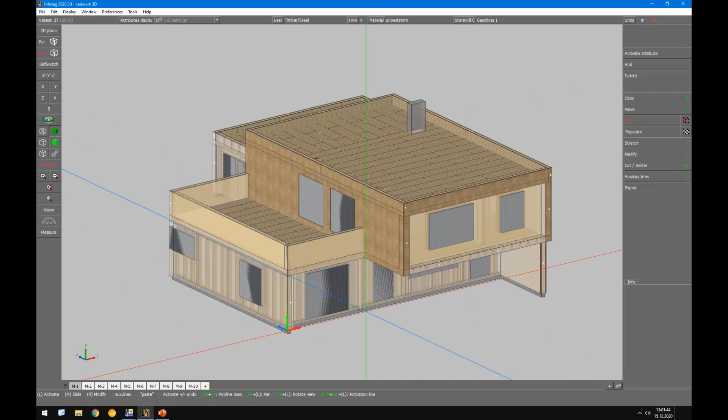Okay, let's not waste time. We start directly, in this case, in cadwork. We see the model there, and let's have a look underneath the rendering, and we will see how it was solved.

So you can see here the CLT slab, and here on the left side of this problem. Okay, I got some issue with my monitor. So we have beams and dowel type connection. So we get one component here in the vertical direction via this column, and one component goes in the upper chord to the next tension beam and downwards. So I'm interested only in...

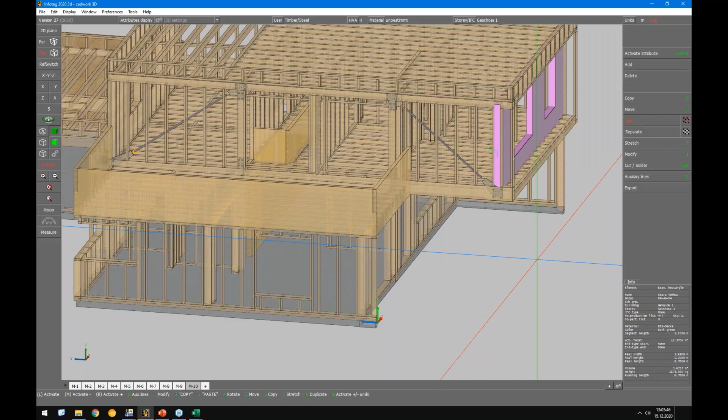The aim now is RFEM, and we can use it by export, for example an IFC file, or we can export a DXF file. But there's one smarter solution. In this case, I will have a look only at this element here, and I'm interested in the center lines, because this is a solid element, and I want to design it with a surface element, not a solid element. So therefore we need the center lines.

Here in this case I can use a variant from cadwork, called - I was not able to rename it - but it's called center surface for CLT. Okay, so I use it and select the element, and then let's go to the wireframe mode. You can see here the center line or center surface, and this is actually the one and only element I'm interested in.

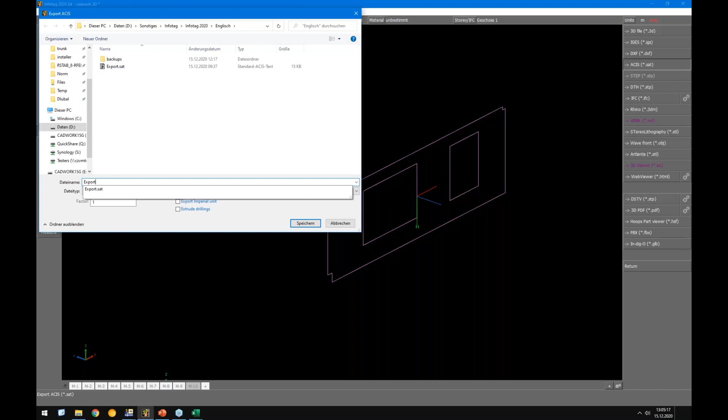So I have the possibility now to export it as a file. In this case, I use the ACIS export format. No wait a minute, I need to, of course, select all of them. All right, I save it, let's say export. And now I switch over to RFEM.

Here I'm able to import this SAT file. I select the Eurocode 0 plus 5 for the SLS combinations, EN 1990 plus EN 1995, and we leave the global Eurocode, but of course you're able to select any other national annexes. Okay, we want to create load combinations automatically. I select it and click OK.

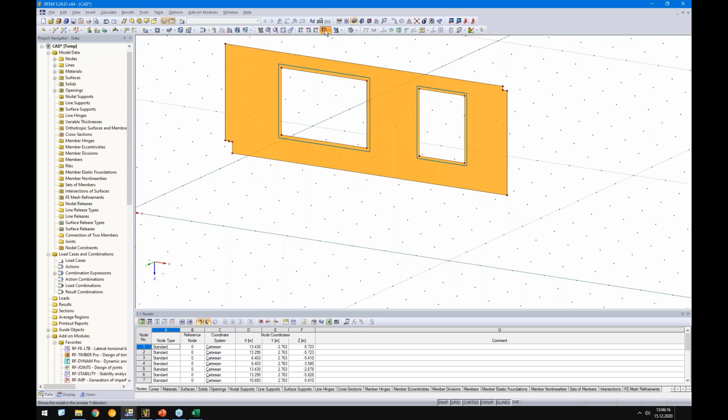All right, then let's see what we have here. So you see it is, or the wall was overtaken from cadwork with the openings, and there is a material assigned. Okay, it's a softwood material, but it's not important for now, we will come to this later. We want to clean up the model a bit.

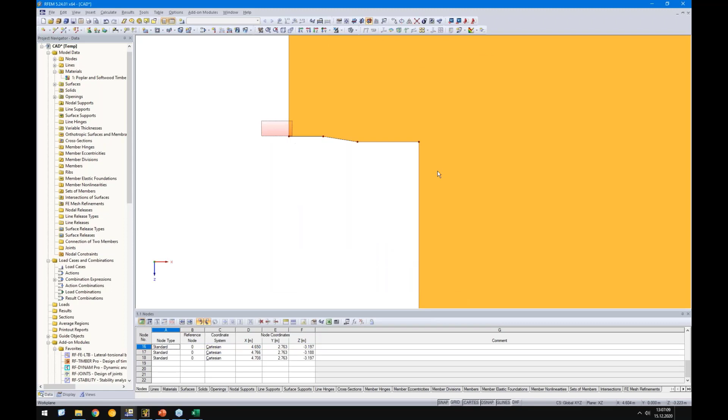For example, I want to ignore this notch here on the upper right side. I will move this node to get a sharp corner. Perfect, and I will do the same here. We have this tiny step here, or this tiny jump, I want to neglect it of course. So I grab the coordinate of this node and assign this coordinate to all other nodes. At the end, I will merge these nodes.

And the same on the left side.

Right side, I mean. All right, so now we can start actually by adding the loads, supports, and so on. But before we do this, let's think about what needs to be checked and what is important.

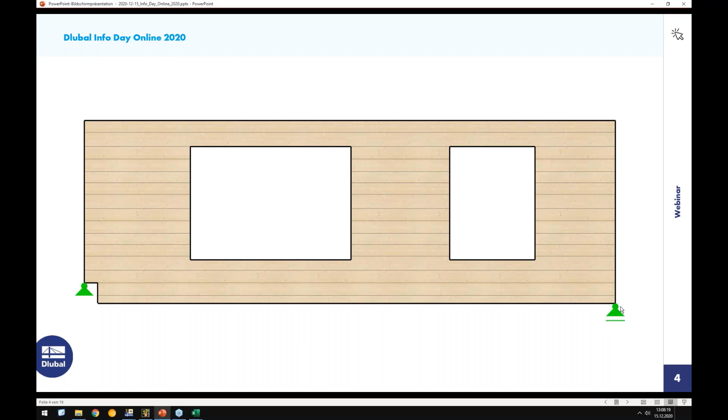You see here the rendering of this surface, and it's clear when there should be a support on the right side that the outer layers should be orientated in horizontal direction. That's one important thing, we need to take care of the orthotropic direction. So the outer layers should be horizontal, and every second intermediate layer should be orientated vertical. Next, we need to take care of the supports. In this case, it's just for demonstration reasons a nodal support. We will not use it afterwards in our design, but for the slide it is okay.

We need to take care of the FE mesh. What size should be used or is suitable? We talk about the stiffness of this CLT element, especially when we check this section here, through the wall. We see the horizontal layers and the transversal layers, orientated 90 degrees to the horizontal layers. And you see this white area - this is the space between this board and this board, because we do not use any glue at the narrow sides of the boards. This, of course, has influence on the stiffness, and we need to consider this correctly.

Okay, we have a tiny notch here on the bottom. Of course it will not be controlling since this element is really high in ratio to this small notch. But imagine when you have a CLT element as a beam, and you extend this line here, then you will see you have around 50% of the notch, and then it is much more controlling, and this fact needs to be checked. I'm just saying that you should consider it.

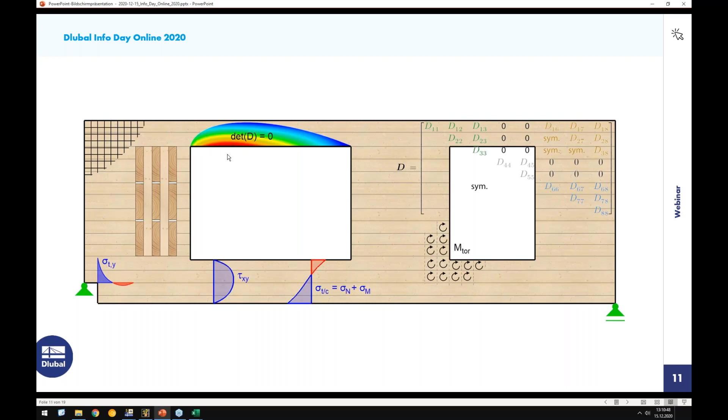Of course, we check our normal shear stresses, we check our normal stresses. Maybe buckling can occur - in this case we have roof beams and floor beams. You can imagine when this acts as a one-span beam, the upper chord is under compression, so it can happen that the bottom side of this upper chord can buckle out somehow. This is a fact we can check, or what we will check.

And of course, the window must work also in the deformed shape, so it should not get any crack or be destroyed. So we need to check the deformations, especially the deformation inside here, and of course the global deformation. All right, that's so far for my presentation on the slide side.

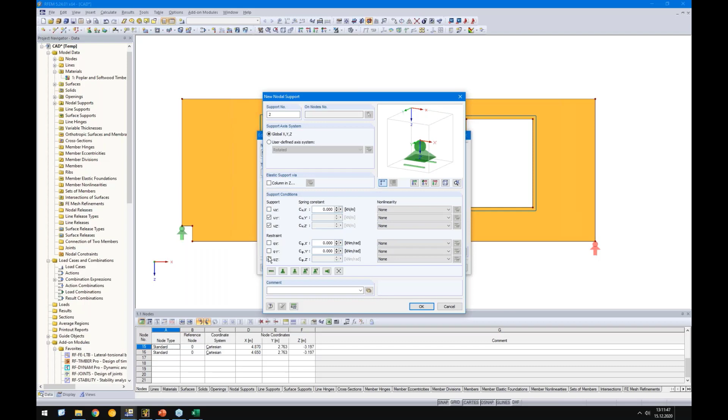And now, let's start directly in RFEM. I will start really with nodal supports to see the effects. I will support it on the left side, and on the right side I will use no degree of freedom in X direction. Of course, our wall is supported by the beams - the roof beams, the floor beams, and the walls. In this case, I will directly add line supports, supporting it only in Y direction, meaning out of plane. So here, here, here, and here.

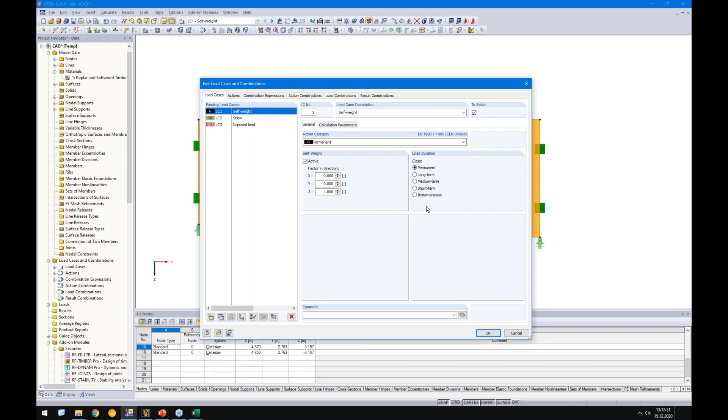All right, so then we can start with loading. We create, first of all, load cases. Load case 1 should be self-weight, and we want to consider snow load, and of course imposed load for the floor. You see here the load duration was assigned automatically, dependent on the action category. Now we start to fill the load cases with loads.

All right, so for the roof we have a line load of 5 kilonewton per meter. And for the floor it is the same, 5 kilonewton per meter. Then for the windows, of course, the window has a self-weight as well, which needs to be considered. Which ways do we have to fill loads for openings? There is, under tools, generate loads from area loads on openings. There is an option, but as you can see, it distributes the load also to all boundary lines, and this is maybe not the correct way I want to consider now.

I want to say that the whole window weight should act on these bottom lines here, so I use a normal line here. When you consider we have a density of 25,000 Newton per cubic meter, and the height of the window is 1.83, and let's say 3 layers with 5 millimeters is 0.015, that equals around 0.7 kilonewton per meter.

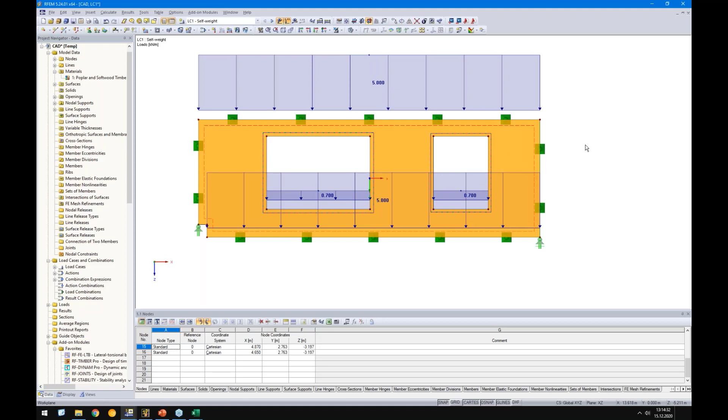Okay, and at the end we need to consider the weight, the self weight of all components which will be fixed to the CLT element. In this case it acts on the whole surface, so I use a surface load. It should act in Z direction, and the load magnitude can be set here.

In this case I could calculate it manually and enter the value here, but if you do this often, you waste a lot of time. So it's better to use our multi-layer composition.

Inside here, I have prepared a few compositions for the wall structure. In this case I use this setting here. Let's have a look inside.

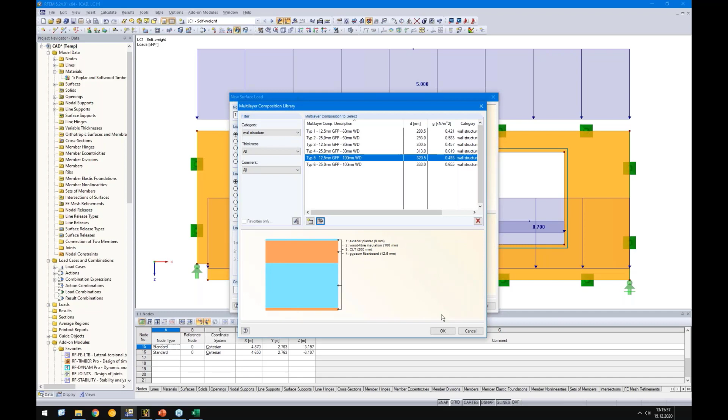So there is an exterior plaster on the outside, wood fiber insulation, then I have added the CLT. It should become 200 millimeters, and the density is 0 in this case because I consider the self weight of the CLT directly in my load case 1. So it's not necessary to enter a value here, but 0 isn't allowed, so just enter a small value like 0.0001 to get it directly into the graphic. Otherwise you need to delete it and you don't get this proper drawing. All right, let's overtake this value and click OK, and here we go.

So the next load case is snow load. The snow load is 3.6 kilonewton per meter. And at the end we have the imposed load for the floor, and the floor beams are fixed on the bottom side of the bottom chord with 6.5 kilonewton per meter.

All right, so far so good. We have finished loading, and we see directly the load combinations. Maybe you see here the 1.8. This considers the creeping effects.

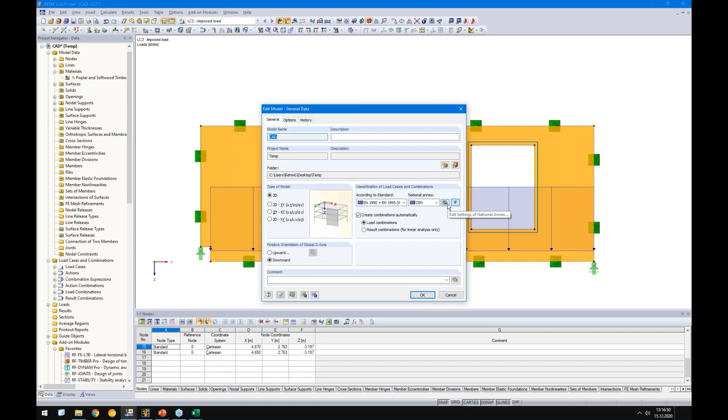I forgot to switch this, or to say, you can switch the KDEF factor at the properties of the national annex, and here on the bottom side you can switch, for example, to 0.6. When you check it, you see the factor is considered in the load combinations for the quasi-permanent loading.

All right, so then we can start with the analysis, and before we do this, let's check our FE mesh. So I just create the FE mesh and see what is the result. And as you can see, the FE mesh is absolutely bad and needs to be optimized. You see here it's the default setting of 0.5 meters, what we use in the background, but what FE mesh size should I use in this case?

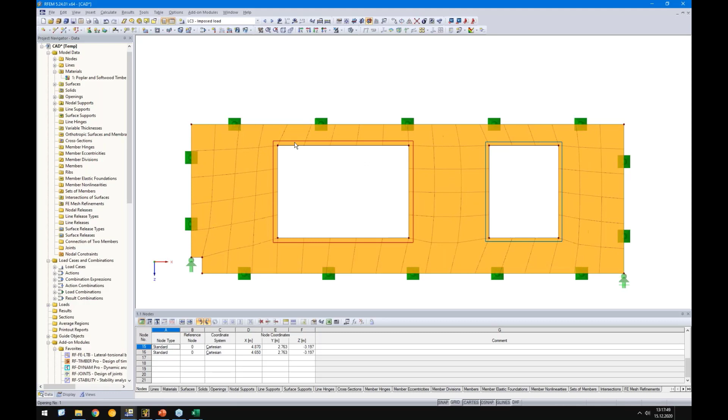The weakest point, I would say, or the weakest area, is here the upper chord, and you should have at least 3 to 4 elements over the length of the height of the upper chord. And with the background that the producer does not put any glue on the narrow sides, and even if they do, I do not recommend it as a rigid connection, because of humidity effects and so on.

Because of this, and we check this distortion design, what I mentioned in the presentation, the board width, or the FE mesh size, should be the same as the board width. So when you think about the ratio of board width to board height, around 4 to 1 or 3 to 1, then with a board thickness of 40 millimeters, what is used in this example, and using 3 to 1, we get 120 millimeter board width.

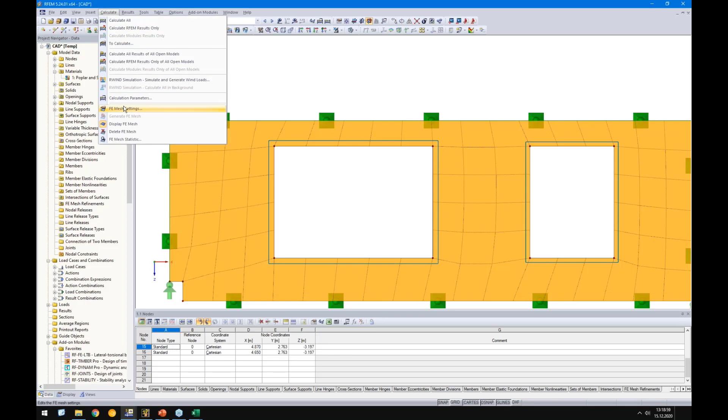So I will use here, let's start with 0.1 meters, and regenerate the FE mesh, and we will see, okay, we got 4 elements, we have these small triangle elements here and here. For membrane forces that's fine, but for bending they could deliver some bad results. So maybe I will increase it a bit and see what's going on here. Yeah, 0.11, looks good so far. So we use this mesh size for the analysis.

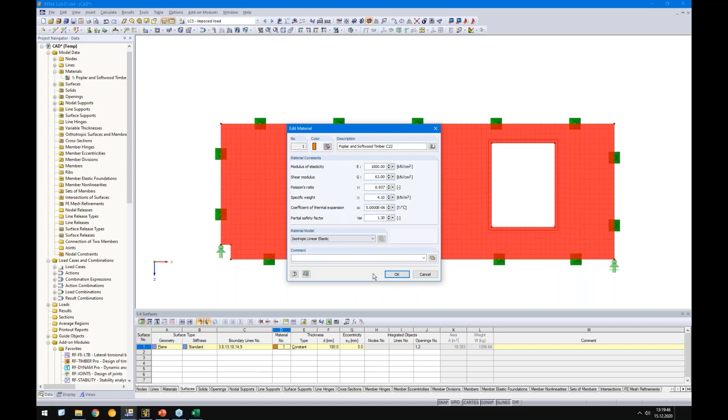Okay, then just try to run the analysis, and you will see we get an error message because of Poisson ratio. This is just a poplar softwood timber with an isotropic linear material model. Of course we can change it here to orthotropic elastic 2D, but in this case that's something special with CLT, because for CLT we have our add-on module called RF-LAMINATE.

Inside RF-LAMINATE we define the composition. And afterwards, before we run the analysis, the stiffness gets exported to RFEM, and then the internal forces are calculated based on the stiffness we exported. I want to design surface number 1 according to Eurocode for CO1 through CO5.

So for material characteristics, here we go with defining the composition. We have to select the surface, it's surface 1, and here we can import compositions from different producers.

That's one way, and the common way, to not favor any producer, is to create it manually. In this case, this is what you can do too. So I'll load the material from our material library.

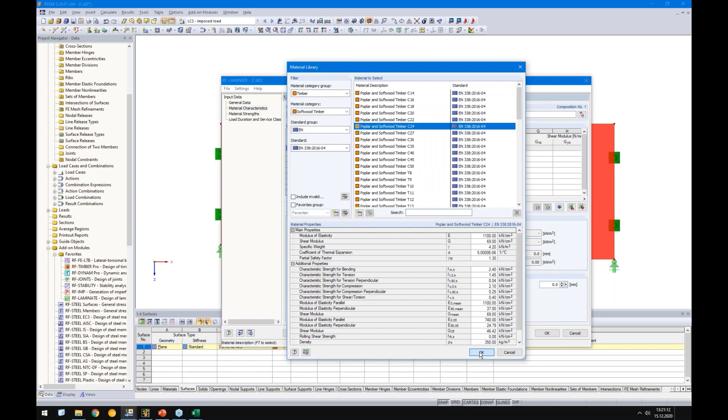So it's softwood, and I choose C24 in this case, and you see here all settings are filled. And in this case, I select cross-laminated timber. Let's see what's going on here.

We have the thickness, 40 millimeter is fine in this example. The values for EX and EY are loaded, and for shear modulus and so on.

Here for the second layer, I hit the F8 button. It overtakes the entry from the first column. So in this case, the orthotropic direction is 0.

You see here this coordinate system. The red arrow is the x-axis, and the green one is the y-axis. So if I rotate the second layer, you will see the red arrow goes downwards, and this is the transversal layer, so the second one. The same for the fourth layer.

Then let's go to the next tab, the material strengths. Here we simply modify the shear strength a bit because we do not consider any k_cr for surface design, and therefore I will modify it and set it for all layers.

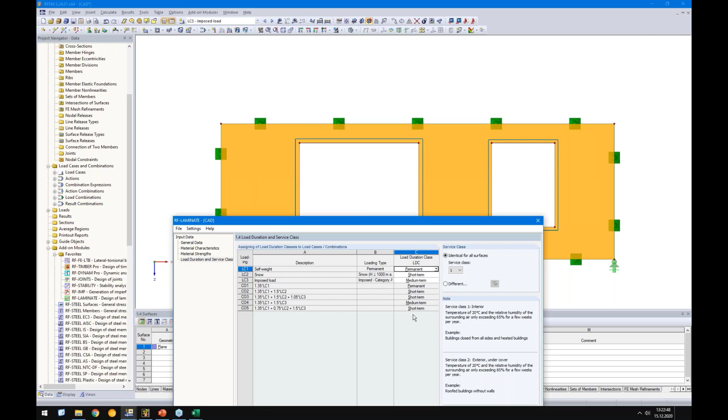The last tab is about the load duration class, but it was assigned automatically to the load cases, and therefore we always use the shortest load duration as the code offers, and it is assigned automatically. Here are a few settings about the service class, but this is fine for us.

Okay, let's go back to the composition, and let's check the stiffness matrix. So we have the stiffness matrix for bending, the elements for bending, for shear, and for membrane.

In this case, I do not consider any wind, since the wind was really weak in this example, and it is not controlling for this example. It's much easier in this case to consider and envelope the results. So therefore, in our case, only the stiffness matrix elements for membrane, meaning D66 through D88, are necessary.

But the only problem we have now is that we did not load it from the producer library. Therefore, we have a bit too much shear stiffness inside the plane, because how should the program know about the glue on the narrow sides? This is what I want to show you about this issue.

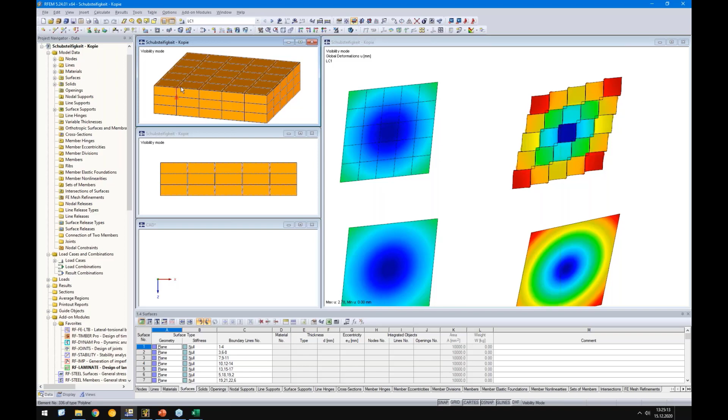So here I have prepared a small example with solid elements. In the upper one, I have no glue. On the narrow side, I have glue, so there is a rigid connection between the solids. On the bottom side, you see I have modeled a small gap in between each board from this direction, and also in the other direction on the upper side. And here you see the results.

This is the result from the solid, and this is the result from the surface and RF-LAMINATE. You see the result is the same. And of course, if there is no glue on the narrow sides, the deformation gets bigger, and this effect needs to be considered also here in RF-LAMINATE.

What you need to do is consider the ratio from this solid element to this surface or solid element. Then you get a factor and you know how to reduce the stiffness. Of course, this is really time consuming, and nobody wants to do this.

Fortunately, there is an approach already, based on the Austrian National Annex. Here you see this Excel sheet, which you can download afterwards on our homepage. You see here a small table, and you need to enter just the thickness of the slab, the amount of layers, and the board width, and you get a reduction factor of 0.59.

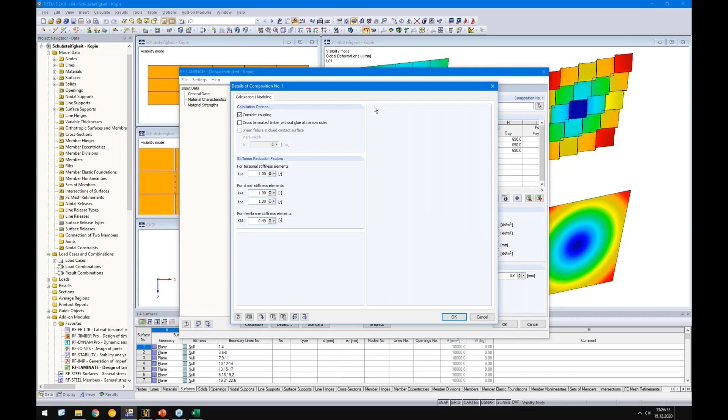And when you enter this value here in the details of the composition, as you can see here, you get exactly the same deformation as the solid elements have. This needs to be done in case the producer does not provide us any values, but normally they do, and therefore you don't have to waste time for this. All right, so let's go back.

For our example, we need to figure out these factors, so I'll open the Excel sheet. In this case, we had 200 millimeters, 5 layers, and 120 millimeter board width.

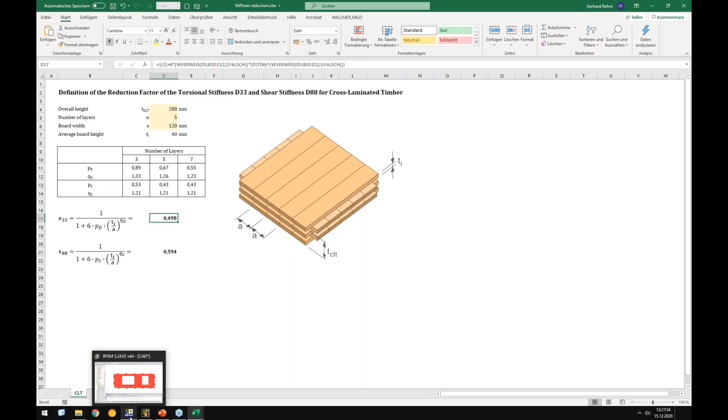We have a reduction factor for the torsional stiffness of 0.5, and for the in-plane shear stiffness of 0.6. These values we take over now, so it's 0.5 and 0.6. I use it also for the torsional element, since we do an eigenvalue analysis afterwards, and there the torsional stiffness is important too.

Here I say I have no glue at the narrow sides. You see there is an E-modulus in Y direction considered. We will check what happens afterwards, and we have 120 millimeter board width, that's because of this torsion design. As you can see here, the E-modulus in Y direction of each layer, not of the whole composition, only of each layer, is set to 0.

All right, and then let's start the analysis. Okay, so this is the result.

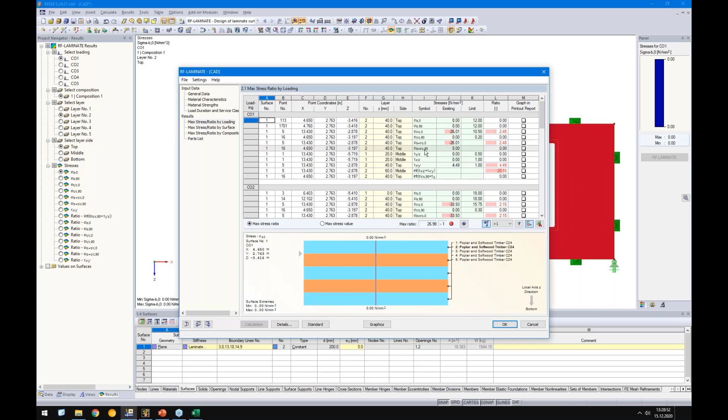The first time really confusing, but let's see what we can do. In this example, in this tab, you can select which designs you want to see. In this case, we have only membrane forces, so the stresses are constant over the thickness, and therefore I'm interested only in the results from the middle layers. Of course, I'm only interested in our normal stress and in our shear stress in-plane, that's XY, referring to the local axis system. Afterwards we activate the torsion design, but for now it should be fine.

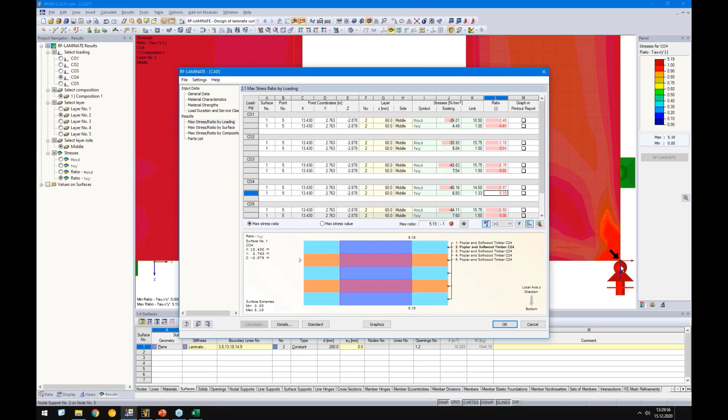Okay, then we come down to a ratio of 5 point something. Let's see where it happens. You see this black arrow here - of course, it's exactly at the location where the singularity is, where the nodal support is. And of course, everyone who dealt already with FEM knows that's a typical singularity, and we cannot evaluate these results.

So what can we do in this case? Of course, we can do the same as we do for loads - we distribute it to line loads or area loads. So in this case, I will distribute it to a line load.

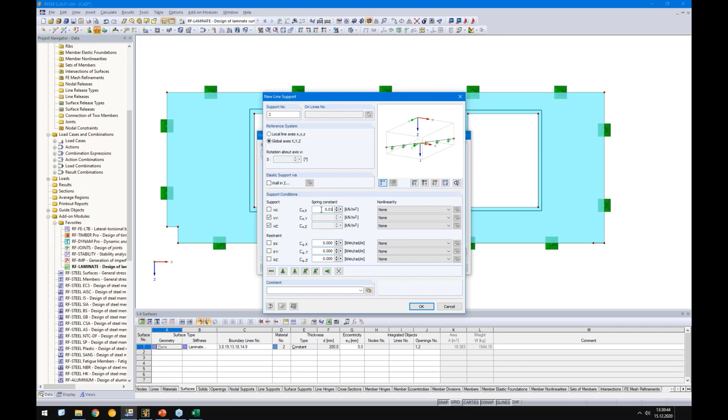No, wait a minute, it was the start. Support width is here 22 centimeters. Okay, so let's start here with the line support, and of course, yeah, we should release it in X direction, and I create only one support, and it should be supported in X direction. Therefore, I enter a tiny spring here in X direction, otherwise the structure would move to infinity.

All right, then let's go back to RF-LAMINATE again and check what happens. Yeah, so we had a ratio of 5 point something, and because of the line supports, we came down to 0.99. Of course, when we check the maximum ratio again, it comes from CO4.

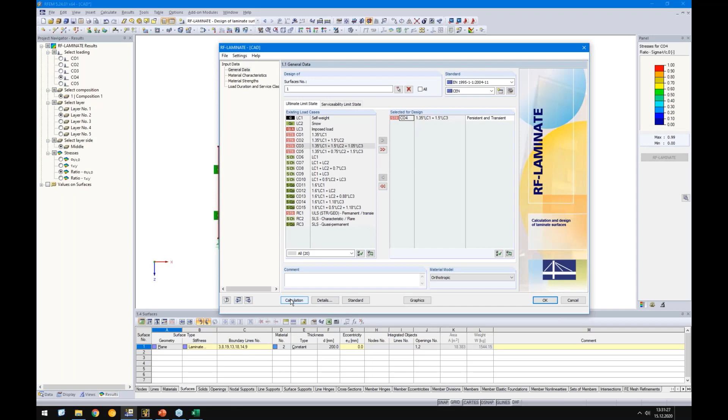Maybe the easiest way, I will remove all other COs for future analysis, because CO4 in this case is design giving, and I will check only CO4. It saves me a bit of time.

Okay, so we have 0.99, and when we check it, it's not in the corner, but it's here. Yeah, so we have no stiffness here on this line, but then we have a really stiff or rigid support, and of course we get another singularity here.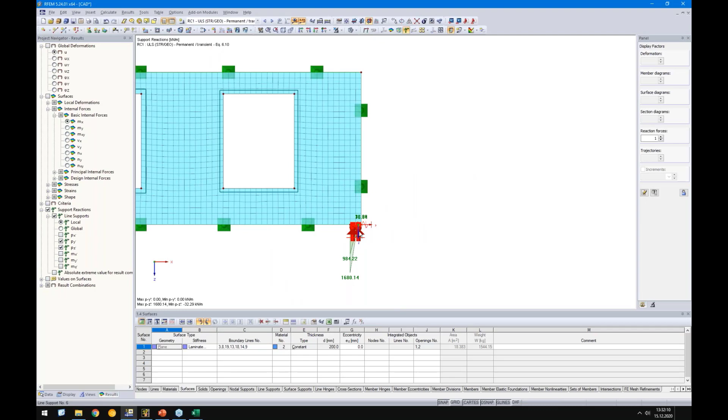Of course, in case we use this approach, we have to consider, okay, what about our support reactions? So I will check our support reactions, and we can see here, maybe we need to refine the mesh a bit, but you can see it here, also tension forces are covered by the support. Of course, this should not happen in our example or in general in timber.

Therefore, I add here a nonlinearity, which says, okay, please fail if there is a negative support force. So in case of tension, the forces should fail. Okay, then let's check it again, just to avoid any restraint here in this corner. Okay, then we are fine, perfect.

Okay, but yeah, let's go back to CAD work, and let's see.

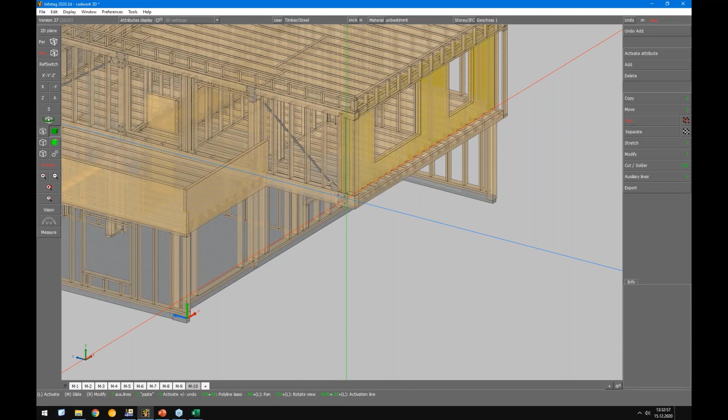Let's see here. This is considered, or the support condition here on the left side is still considered a rigid support. Maybe that's true here for the right side, but of course not for this side. How can we represent this support in our 2D analysis?

I have prepared a scene in CADWork, so these are my elements of interest. In this case, I can simply say export as a module structural system. This is what I want to do. Okay, there's something about the connection. I want to save it, let's say on the desktop.

I want to save this submodel as a DSTV file on my desktop. Now I can import it also here on the left side, CADWork STP file. So it's an STP file based on this interface for steel constructions, but it works also for timber.

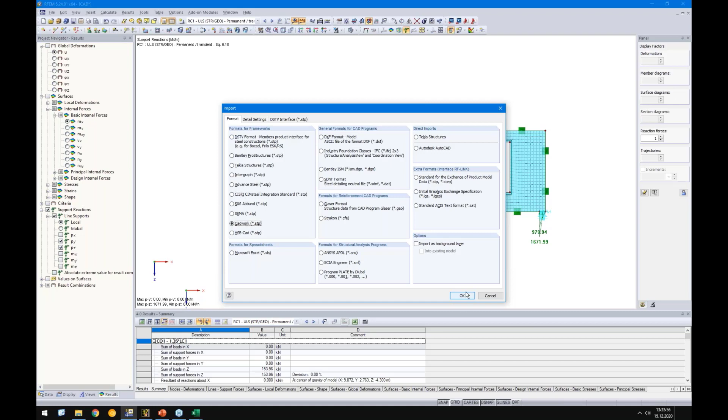Okay, so here we go. We don't need any load combinations, and we can simply import this file. Looks good so far. So we have the member elements included in RFEM, and let's see the wireframe model.

You see, there are still a few issues. We need to fix this, or we can fix it quickly here. So you see here, members are not connected, or members are too long, and so on. That's because of the half width of this beam element. This one we will fix via drag and drop directly, and the same on the right side.

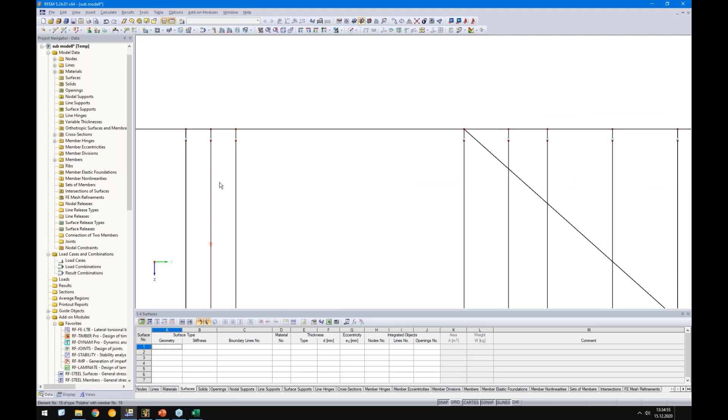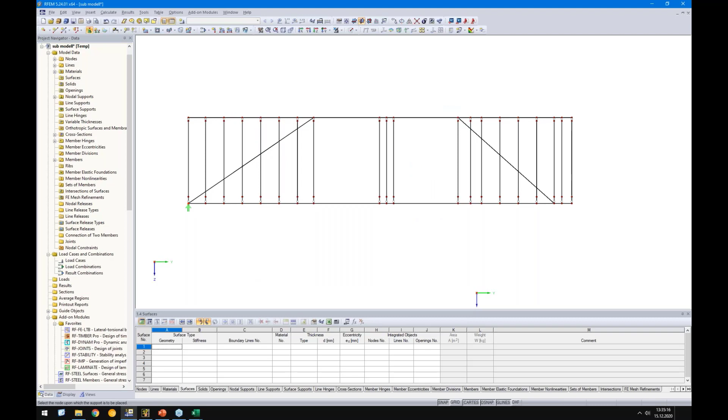And here on the left side. Okay, then we quickly support it. So we need to support it in Y direction, otherwise the beam would rotate around their own axis. And there is another support underneath this and this column. So I will add another one, which is sliding in Y direction.

Here and here. And the top chord, of course, must be supported, otherwise it will fall down or the beam will rotate around its own axis. Okay, so in this case, I need to restrain it around the Y-axis, for example, with a spring. And here I want to support it in X direction. For simplification, I just select it for all nodes, but I'm only interested in the vertical deformation.

And you see here, the vertical deformation is sliding, which is fine. Okay, and what is my aim now actually? The aim is I want to add a unit load here. And based on this unit load, I get a deformation. And based on this deformation, I can calculate my equivalent spring.

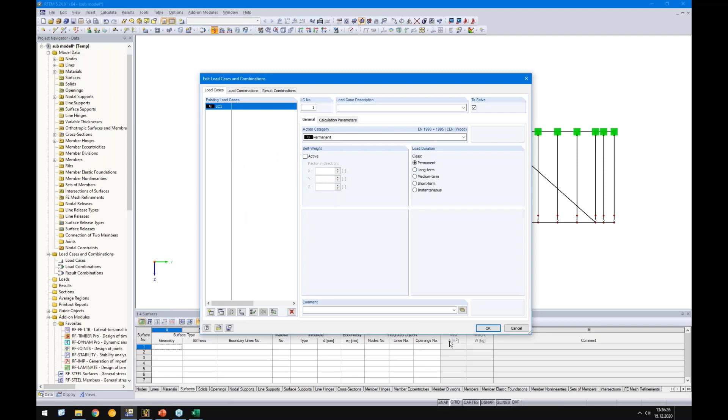So I create a unit load of 1 kilonewton. I deactivate the self-weight in this case. Please see, 1 kilonewton. And let's see about the deformation in Z direction.

Okay, I forgot to mention here we have some hinges and we have here some beams. Maybe I explain it in a better way. So in this case, I directly replace these beams by truss elements, with a hinge connection on member start and member end. And here these coupling members, which consider the eccentricity.

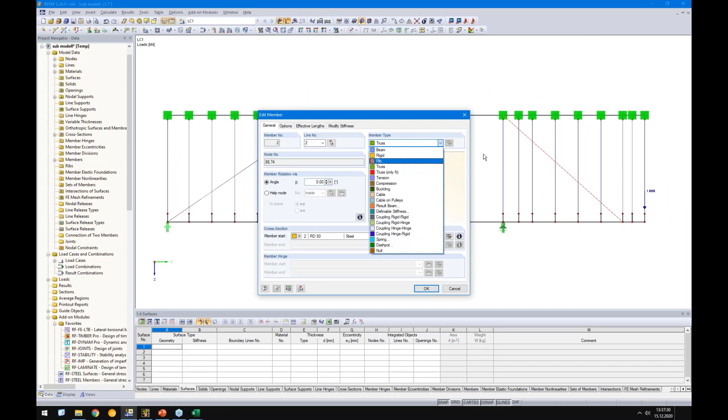The hinges come directly from CADWork, but I don't want to consider it, so I will delete it. Of course, you can discuss if this should be a truss beam or maybe better to use a tension beam, but in this example, we get only tension forces, therefore it does not matter.

Okay, we get a deformation of 0.147 millimeter. And of course, we can use now the spring. But of course, we know there is an OSB sheet on these beam elements. So we can add this OSB sheet too, to have more stiffness. This is what I will do now.

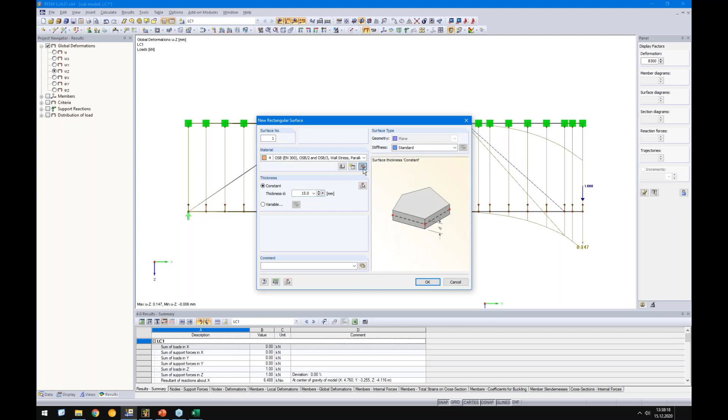I will create a new surface. So we have timber, OSB, and here we select wall stress. Should have 15 millimeter OSB 3 sheet, 15 millimeter. And in this case, of course, we cannot use an isotropic linear elastic material model. We will switch over to orthotropic elastic, where we have different E modulus in different directions.

Okay, so here we go, on the left side and on the right side. Okay, then let's run the analysis.

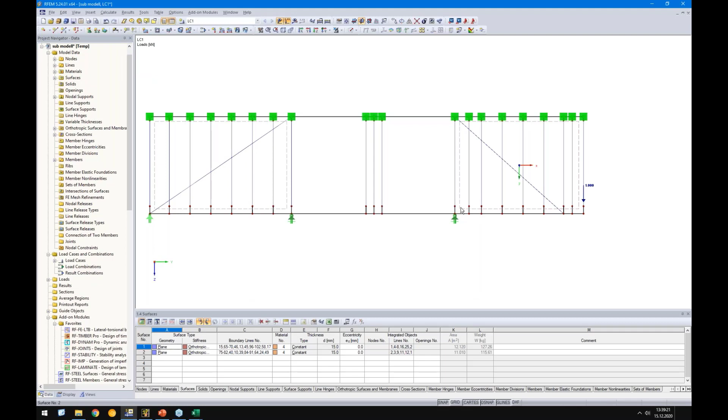We get an error. This error is because of these tension beams, or these truss beams. And you see here, there is no node, there's no connection to the beam, which is fine, but of course, there should be no connection to the surface as well. In this case, the easiest way is to tell the surface, please do not integrate this line, and then the member is not integrated automatically too. I will do the same on the right side.

Okay, let's run the analysis again. So we remember we had 0.14 millimeters, and now it comes to 0.089 millimeters. Okay, the FE mesh can be optimized.

Okay, in this example, of course the OSB sheet is connected rigidly to the beam elements. Of course, that's not the truth, because each timber element is connected to other timber elements with an elastic spring, for example, and this is what I want to consider too.

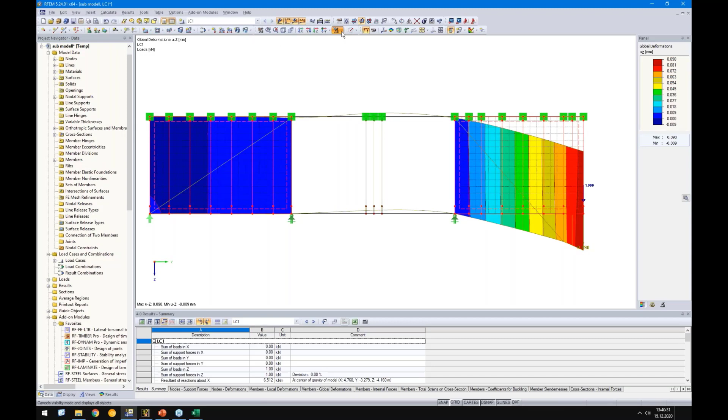So for this case, I will select only 2 surfaces and all integrated objects. Now I want to release the surface from the beam elements, and I can do this with line releases, so new graphically, and here I define a spring. I want the axis system to be according to the z-axis coordinate system.

So in this case, I can consider x and y degree of freedom. The spring constant depends on the fastener, in this case some staples. For one staple it's around 500 Newton per millimeter, and when you use 10 staples per meter, you get 5,000 - so 500 by 10 staples per meter.

The same here, in both directions, and here I release surface number 1. I select all these lines, and I do the same on the right side, so this is surface number 2.

Now we should get a deformation which is between the 0.09 and 0.14. Of course, in this case it's 0.10.

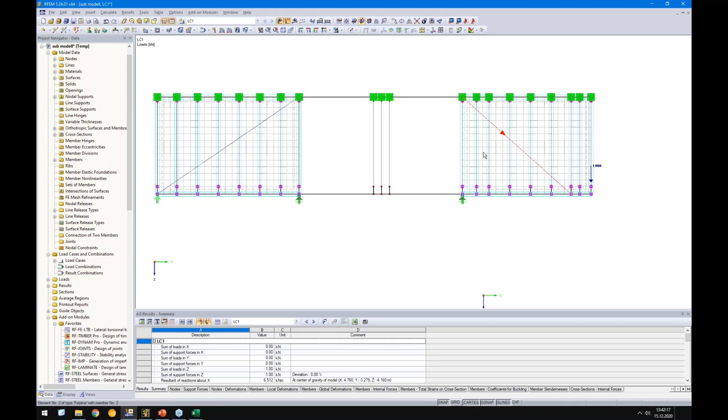Finally we will add another semi-rigid connection, because of this tension beam connection with these dowel type fasteners. So in this case, I select these beams and say please use a beam element, and I want to define some member hinges.

I have prepared an Excel sheet where we can simply calculate this spring. For example, this is the result for dowels from Eurocode 5, table 7.1. For one dowel type fastener with 12 millimeters, we get a spring of around 4,500 kilonewton per meter. This value can be multiplied by 2 because of steel wood connection, and we have 2 shear planes and 25 fasteners.

So we get a spring of 450,000 kilonewton per meter, which is really rigid. So in this case, it should be in Y and Z direction, so 450,000.

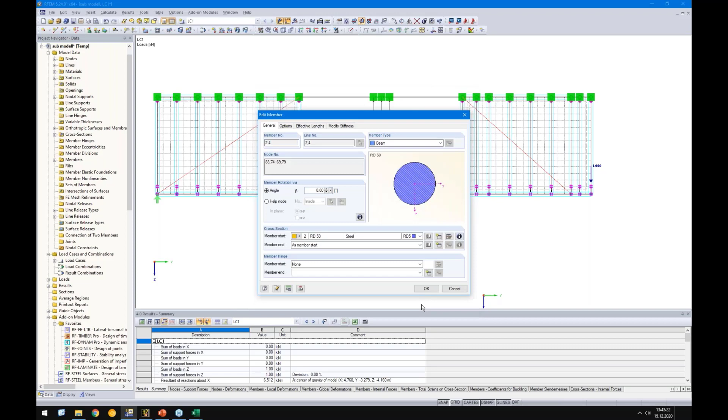And here we can consider just a tiny spring to keep it stable, and of course on both sides. So we had 0.10 millimeter, and now it should become a bit higher, a bit more deformation. So 0.132 millimeters. Let's get back to our Excel file.

Here I divided 1 kilonewton by 0.132 millimeters, and I get this equivalent spring for the whole support. Here I distribute this spring along the line length, it's 22 centimeters, and I get this spring of 35,000 kilonewton per meter.

Okay, and this spring I will enter in my main model. All right, I will change it here, so in Z direction I want to consider this value.

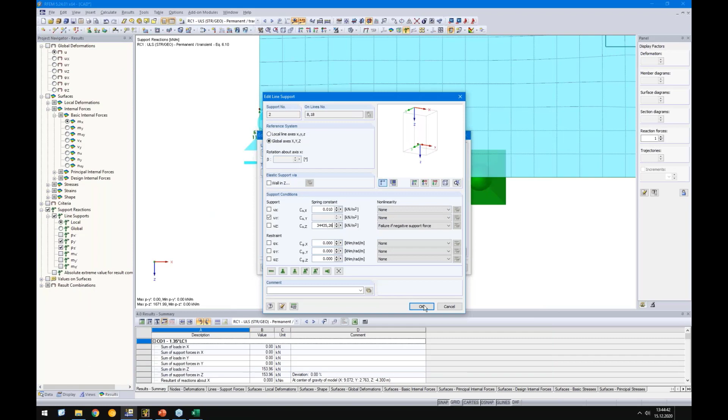Perfect. Of course, here on the right side it's different because here we have a column underneath with 22 by 22 centimeters, and it's, I guess, 3 meters high. So in this case we can calculate an equivalent spring 2, and the program makes it easy.

We can use this function wall in Z direction. So the width was 220 millimeters, the height was 3 meters. Material, in this case timber, has a different E-modulus in different directions. Therefore, since timber material is not yet supported by this function, we simply use a concrete material, a lightweight concrete in this example, which has the same E-modulus as the timber.

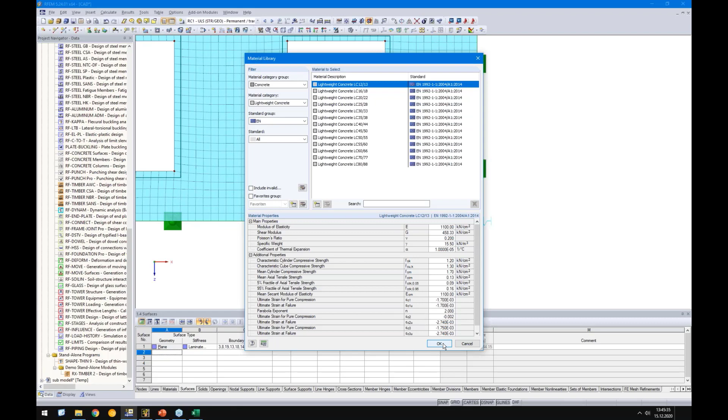Okay, and it should be hinged, and I get here my equivalent spring.

So in this case, it will not work because I don't want to consider the spring in X direction. Therefore I will deactivate it and replace it again by 0.01. Okay, that's it so far, and...

Let's add maybe here this nonlinearity. Okay, and let's get back to the RF-LAMINATE module, and finally let's check the results.

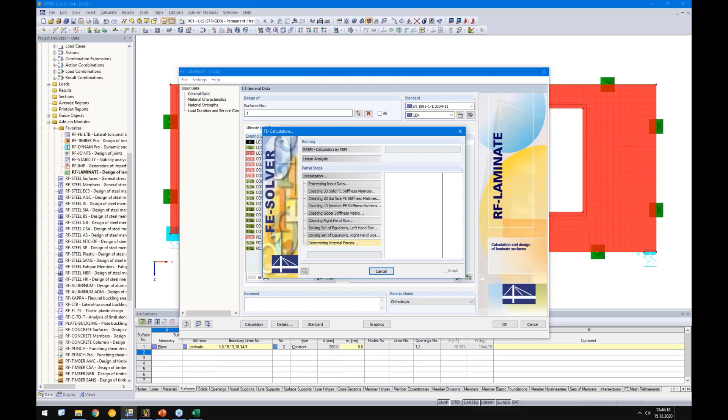Okay, we came down to 0.96, but when we check it, it's not here on the bottom right corner, it's here in the windows, because of course we have some singularity here because of the corners. Okay, but so far it's good.

So now we need to evaluate the results. For the surface design, we need to go away from thinking about member design where we have a clear ratio, because of the singularity. I recommend you follow this procedure. It makes no sense to check here if the smiley is red or green; you need to evaluate it at once.

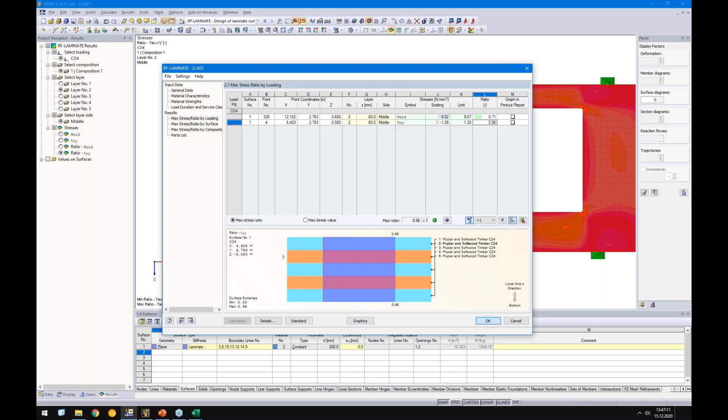In this case, let's check. Let's start here with layer number 1. Of course, we have only one layer side for the results because the results are constant across the width. We have no plate stress and no load out of plane, so therefore it makes it easy.

Okay, let's check the stresses in this case. This is the typical normal stress, where there is tension and here compression on this chord, and the same on the upper chord. We can see directly the ratio here is around 0.6. So even if there are singularities, I would say for this ratio, this is okay, this is fine.

For shear, let's check the shear force or the shear stress. Of course, the shear stress is really high here in this region and this region, which makes sense because there is less height than here or here. Let's check the ratio - we know only the ratio is really close to 1, but the question is only in which areas.

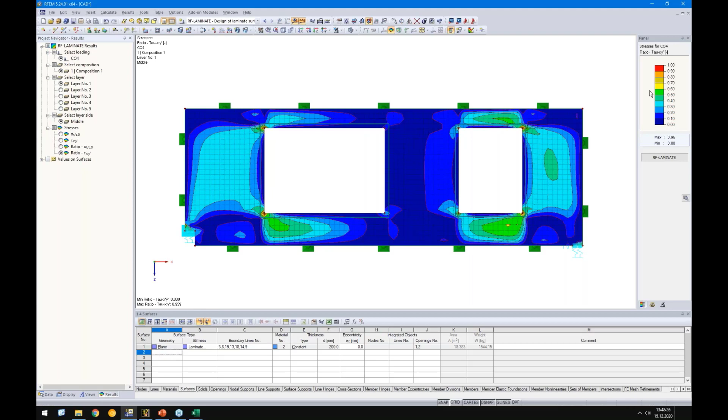This is exactly what you should consider - which areas are affected. In this case, I recommend: please show me all ratios which are higher than 70%. Then you will see, oh, there is actually nearly none, but only here, because that's clear, it's a singularity. You see the stresses become really large within one FE element. So here we exceed the 70% ratio - only these corners have higher ratio, but we cannot evaluate it.

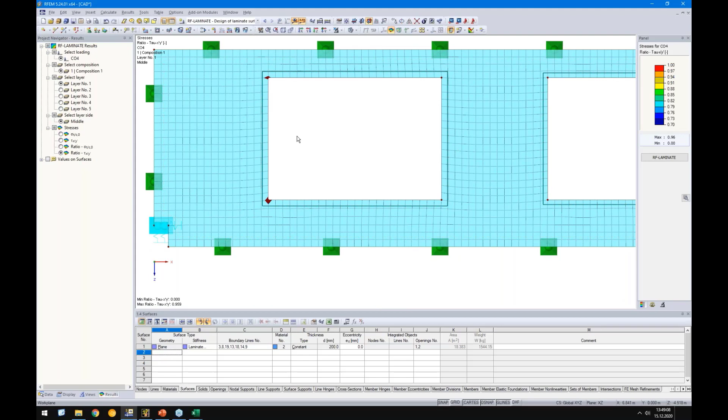There are a few possibilities how you can get rid of the singularities. I don't want to show it in detail now because we have shown this so often in our webinars. The easiest and a good way is to use average regions. So you can create a new average region for surface 1. The center, for example, should be here, and it should be a circle with 0.3 meters. When I click OK, let's check the results for CO4.

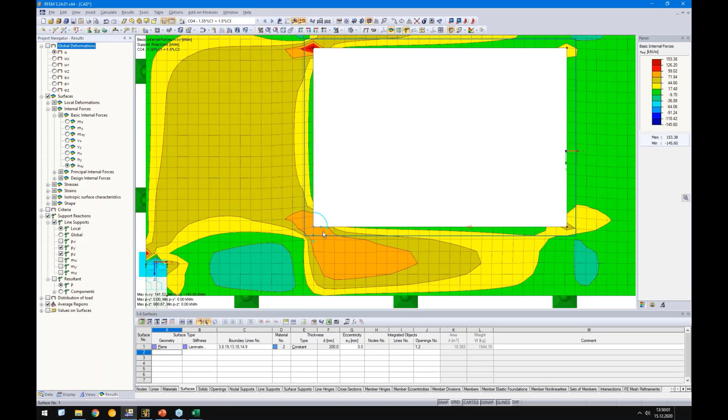In this case, I want to check the shear, for example. You can see here, when I deactivate the average region, this is the result which comes from there. And when I activate the average region, you see the result was distributed along the length, or the height, or width of this average region.

Of course, it's better to add here a mesh refinement to get a finer mesh around these nodes. So this is one option, but I don't want to get into detail for this example or for these average regions, because there is so much information on our website about this, and you find it also in our other webinars, how we deal with average regions.

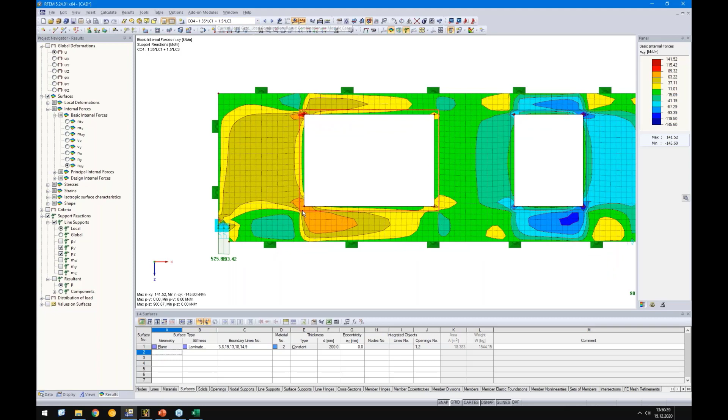Okay, so then let's check this notch result here. In this example I will create a simple section, and the section should start here and should go to 5.5 meters for surface number 1, in, let's say, -z direction.

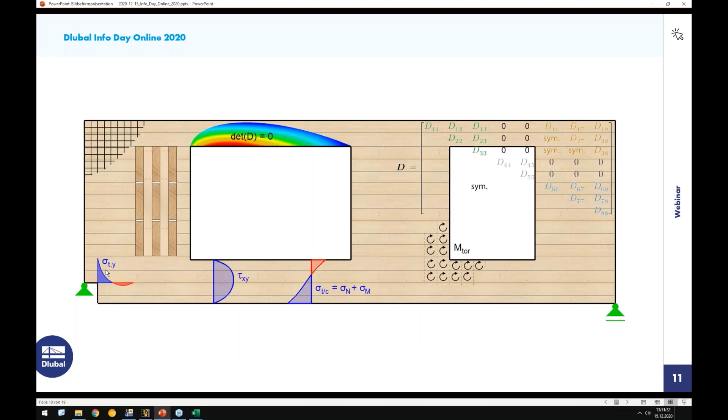To increase this section - now wait a minute. Of course, the section must go out of the plane, and then you see exactly this stress. Okay, maybe better - in this case I used NY, so maybe it's better to use a finer FE mesh here, and then you get this typical transversal tension curve, which is shown here.

I don't want to go into detail for this example because RF-LAMINATE evaluates this automatically, because we have our stresses. So when we check - I need to switch - when we check our normal force inside here, in Y direction. As you can see here, it goes perpendicular to the horizontal layers, so this can be evaluated manually.

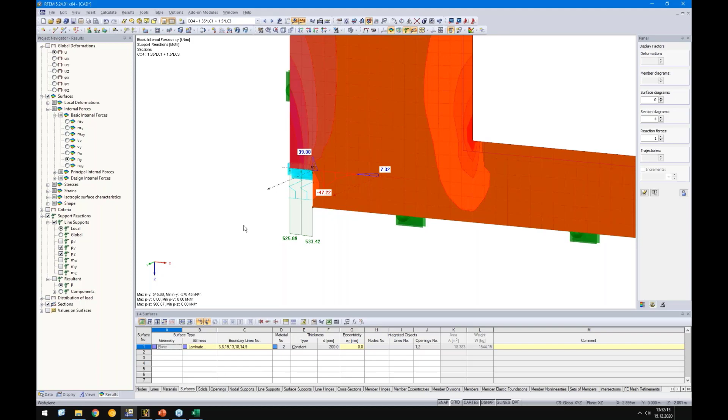We have this section, for example, or you can simply let the job be done from the RF-LAMINATE module, which does this automatically. Okay, so then let's go back to the RF-LAMINATE module again, and let's run the analysis again, and let's see the results again.

So this is actually really simple because we have only membrane forces. You can imagine if you have plate bending and normal forces and so on, a lot more design checks must be done for this example, but in this case it's really easy. So we have only our normal stress, our shear stress, and the accordingly ratio.

Of course, I did not activate it - we need to activate this torsion design because of the missing glue on the narrow side. So this is what I want to do now. I will activate it, and here you see the design is not fulfilled, but please think about the ratio and where the ratio is.

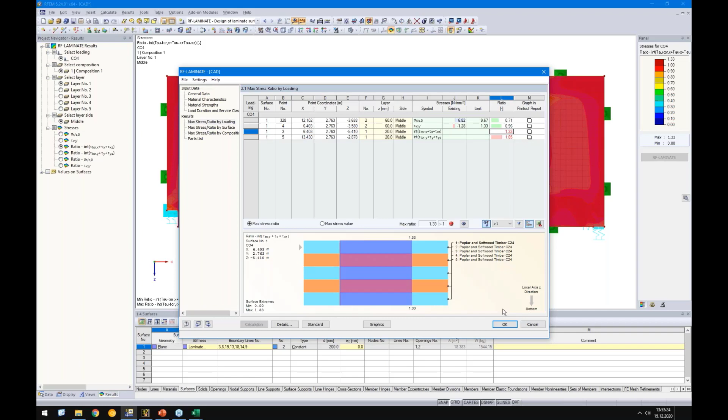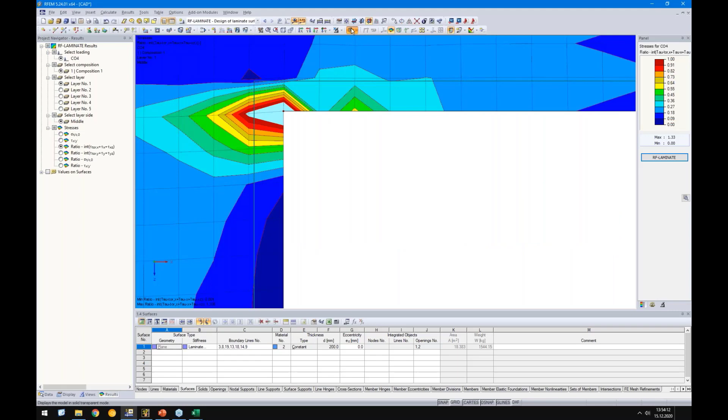So we go to OK and see, the maximum is 1.33, but as you can see it's here at these spots. For this example, I would not define any average regions, because you can argue: when I check everything bigger than 1, so a ratio from 100% to 133%, the whole surface is fine, only this one is not. And vice versa, if you're interested in everything that's fine, just go from 0 to 1, and you see the real ratio. Only in these elements you will not see any ratio, but of course you're not interested in those.

Unfortunately, we have no possibility in timber to distribute stresses to fix the singularities, or to distribute stresses with a nonlinear plastic analysis, since we use only linear elastic material behavior in timber, which is actually common. So there isn't really a way to check it for timber.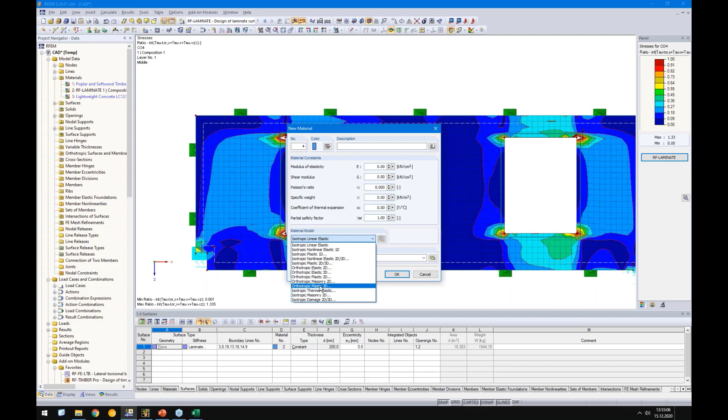We have a new material model called orthotropic plastic 3D, but this is not the wished design for this simple wall element, because it is much more involved. You need to define just the strengths, the limits, and of course you need to model the slab or wall element as a solid element, so each layer needs to be modeled separately. You need to consider modeling the gap because of the glue on narrow sides, or no glue on narrow sides. This is not a practical way to do this.

Okay, then let's check - SLS is missing. But yeah, stability - okay, so let's check the stability of this wall. I'll keep it simple.

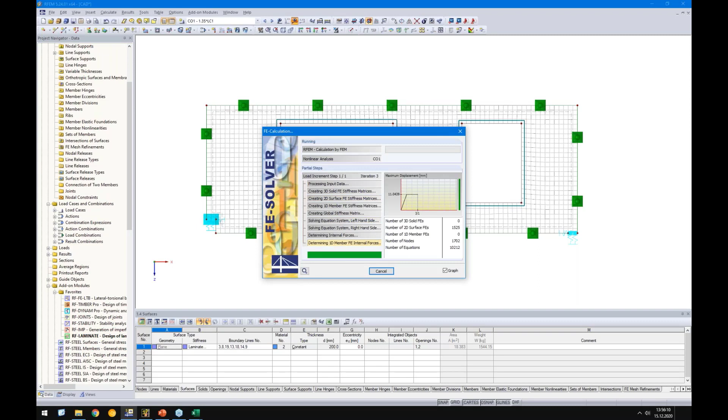In this case, I start my add-on module called RF-Stability, and let's check where we have the highest normal forces. So we go here to NX, and let's see. Okay, we have around 580 here from CO1. CO2 is 806, and CO3 is 996. I guess the other one will not get any higher.

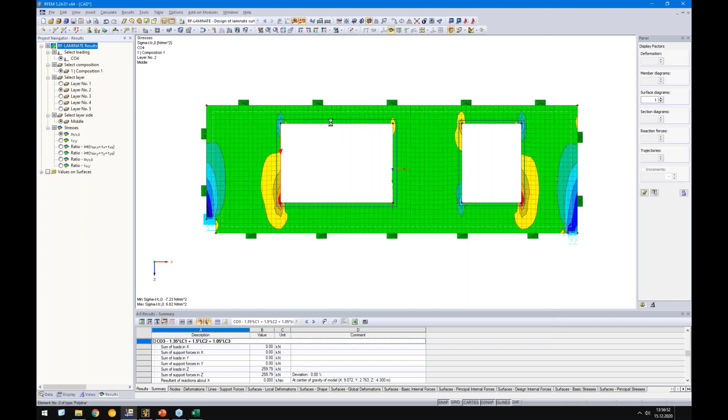So let's use CO3 with the highest normal force in this area, because I believe the first eigenshape will happen here, which is clear actually. Let's go back to stability and select CO3, and simply run the analysis. The only information I get out is the eigenshape, which is okay - so this is the first eigenshape.

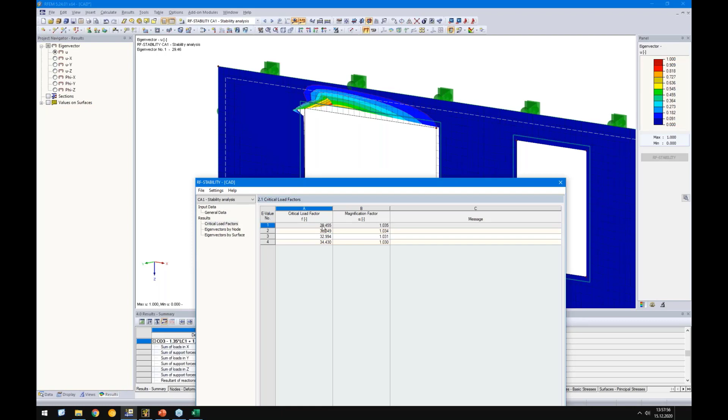It can happen that this bottom chord will buckle out somehow, but of course we need to check the critical load factor. Here you see the critical load factor is 30, or nearly 30. That means you need to increase the load by a factor of 30 to get this failing of the bottom chord. So you need to analyze stability, because otherwise it's on the unsafe side, since no imperfections are considered and so on. But we have a good feeling with this factor, because it's common to use a factor from 1 to 10 for checking stability, and anything bigger than 10 we can think about neglecting - in this case we definitely can neglect it.

So, how we deal with stability design for surface elements, I have shown this on the website for cross-laminated timber. Simply go to Dlubal.com - I need to switch to English - then go to Support and Learning, and here Knowledge Base. I'm not sure if I'll find the correct keyword, maybe it's better to search my name instead. Okay, seems there's some issue with the website, I cannot search for it, but it doesn't matter.

Okay, you will find this information. If not, if you don't find it, please contact us, and I will send you the links afterwards. Okay, then at the end - there's not much more time, but I will show you in a few minutes, so I'll need 5 to 10 minutes more. I will show you the serviceability stuff I mentioned in the presentation.

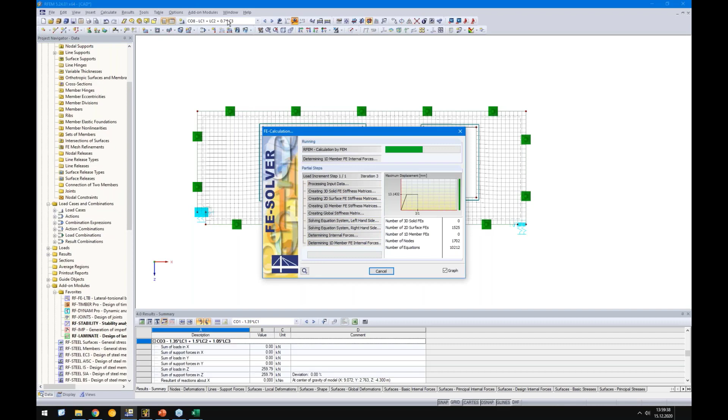Okay, so let's check - in this case let's focus on CO8 only. CO8, that's the characteristic deformation with snow load, or maybe the other one is more important, because the imposed load was higher than the snow load. Okay, so let's check the deformation of this element.

Do not wonder that deformation is displayed with factor 67. So it's clear that the deformation is higher here on the left side because this support is weaker than the right support.

As you can see here, this window is already deformed. And of course, when you think about a rectangular window, this window must fit into the hole after it's deformed, and it should not become any load. How we can deal with this, I will show you now.

In this case, of course, you can analyze or export this deformed shape to AutoCAD or to a CAD file, a DXF file, and there you can insert this window and check if it's correct or if it still fits inside. But there's a much more smarter way.

I will add some rectangular surfaces. In this case, I will use a rigid surface, and here too. And of course, we cannot run the analysis now because this would be too much stiffness.

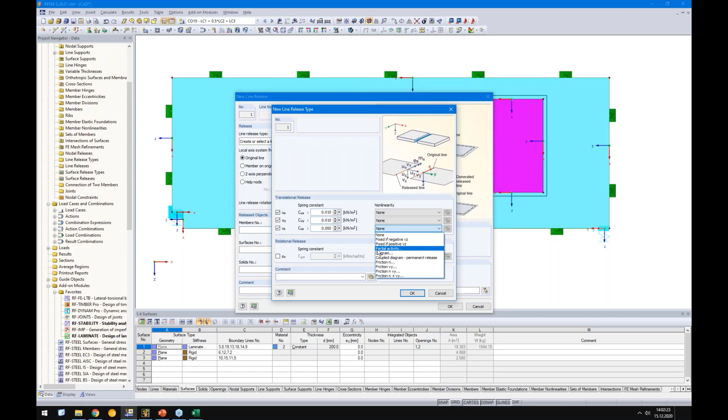Inside here, I can define some slippage or displacement in this case, so let's say 1 centimeter. Of course, you can do it differently for different directions. For my example, it's fine with both directions, plus and minus.

So I will release surface, I guess it's number 2, and I want to release these lines. And I want to release surface 3 for this one here. Okay, and now let's see, run the analysis again.

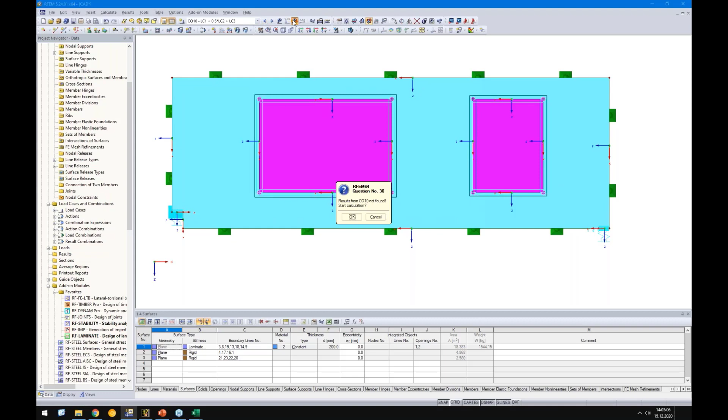I didn't remember about the deformation before, but that's actually not the aim. Let's check the deformation. First, you might see it's a bit confusing because the window is displayed inside the CLT wall, but that's clear.

We model everything, or we have modeled the window, the rigid surface, directly to this wall element. So we do not model the gap, we consider it with a line release. And therefore, the distance now between this node and this node must be smaller than 1 centimeter. You can imagine it's hard to evaluate, especially on bigger models, or especially when you need to check it with some line or some diagrams.

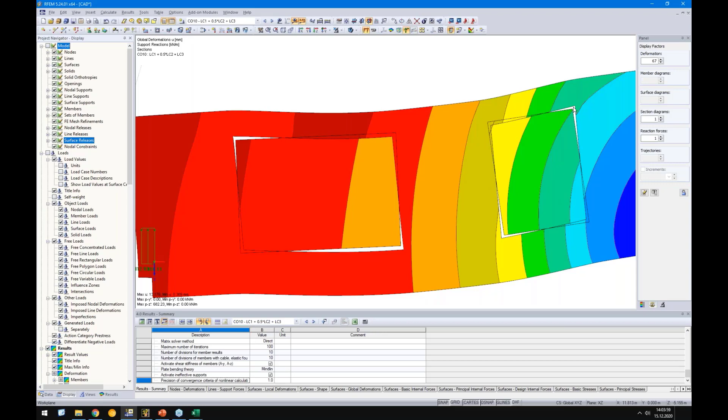You can do this and say, okay, please show me the result diagram, and on this line or on this section, what is the deformation, and compare it and so on. This is actually not a good idea.

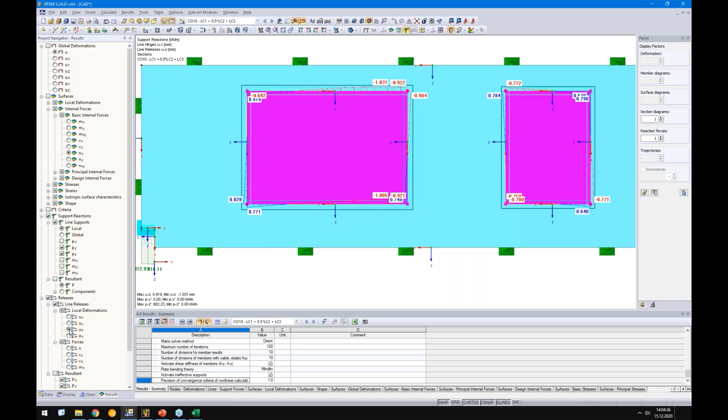Much smarter is to use here our results called releases. Here I can activate the releases and I get the release forces for line releases. So in this case, I get the deformation uz, for example, and you see the deformation.

So here the deformation is 1 millimeter. The limit is 1 centimeter, so 10 millimeters. So we are absolutely fine in this example. This is the way you can check it. You see directly which deformation you get, which relative deformation.

Another option is to check the forces. So we check vz, and as you can see here, vz is 0. And of course, if there would go some forces into the window, into the rigid surface, we would see a force here, and we would see a distribution of the force here. So therefore, it is fine.

This is the way we can check this stuff here. It was clear that the deformation is not getting so big, but on bigger elements and so on, this could be an issue and could be solved.

Because of this, you have to think about the gap between the window and the surface, or the real window.

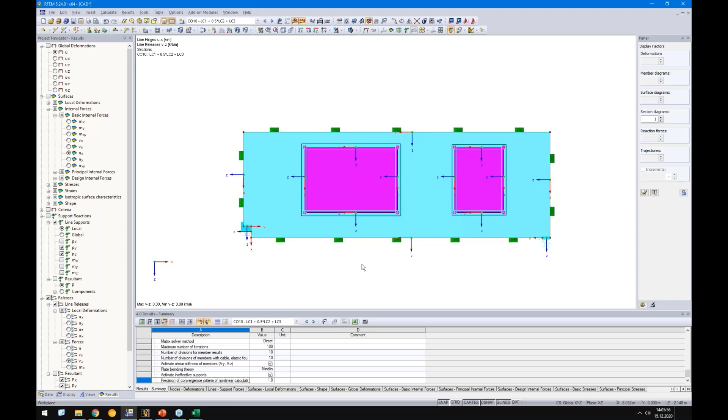So from my side, I finished this presentation. Hopefully it was a good help for you for your future structures. Thank you very much.